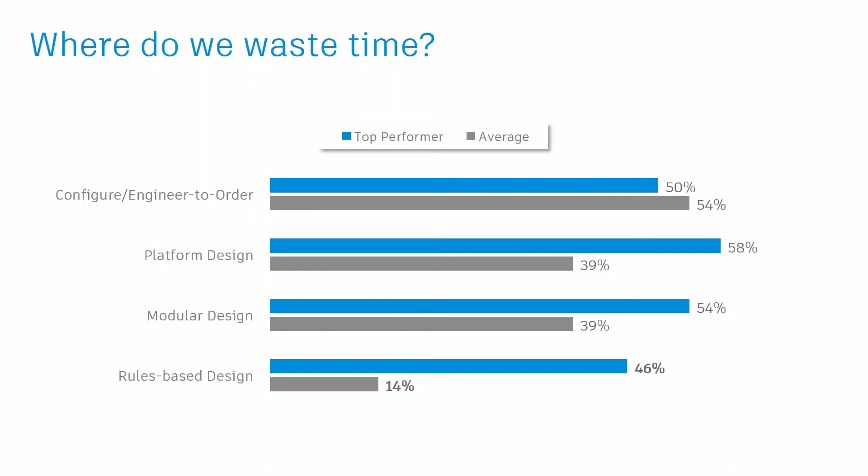Another area we can waste time is simulating our designs. Simulation is fast becoming a much more integral part of the development lifecycle, helping us to make better decisions about our designs and to make those decisions faster.

But part of the challenge of using simulation is the way we integrate it into the development lifecycle. A solution that's not an integral part of this process can add additional steps requiring information to be passed between separate design and simulation software. The result often means that users spend considerable time updating simulation setups to reflect the changes of a design.

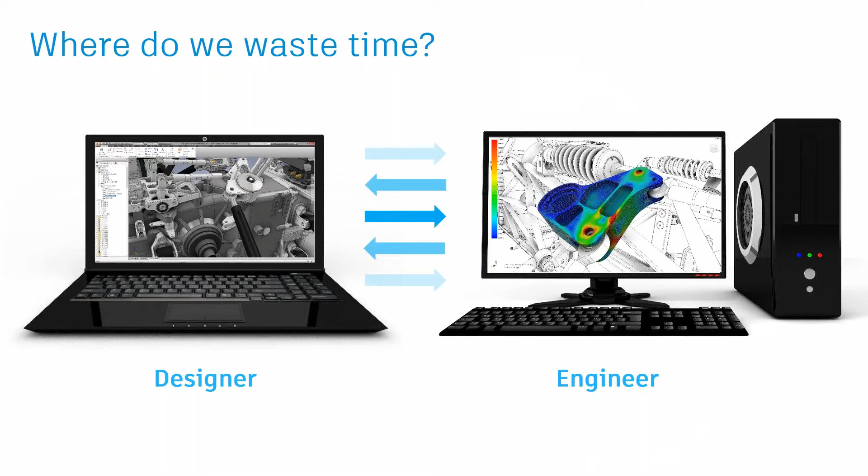So with this in mind, how can we recover some of the time wasted creating and simulating our designs? Let's take a moment to look at such a workflow. In this example, we're going to be working with a robotic welding cell, and our customer here has requested a high-mounted robotic welder.

We need to design a brand new structural frame that we know is going to meet our customer needs. We want to make sure that we start inside of Inventor, and we do this to make sure that all of our data is not only secure, but also managed effectively.

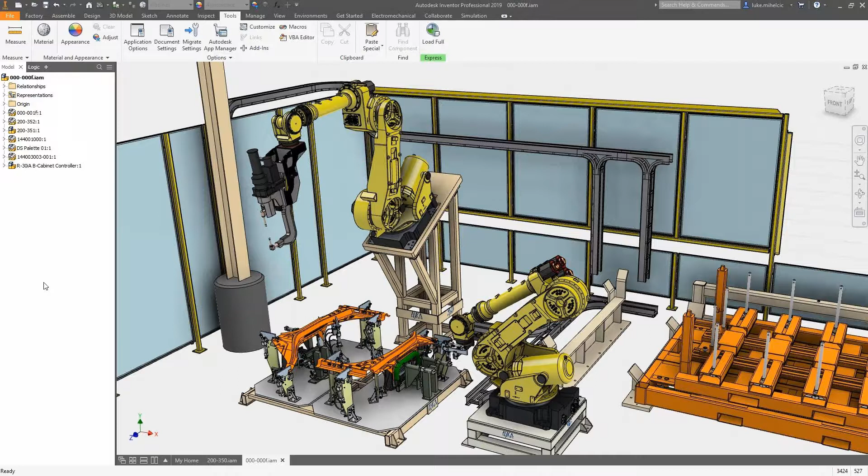Here we can open from Vault, where we'll check out all of the relevant components, and this ensures that no one else is editing the files at the same time.

We'll start with one of our customizable iLogic assemblies. This will help us automate the design process and save valuable engineering time. iLogic enables us to explore different design combinations in real time. We can change height, depth, width, and top offset, and even suppress the front braces if we don't need them.

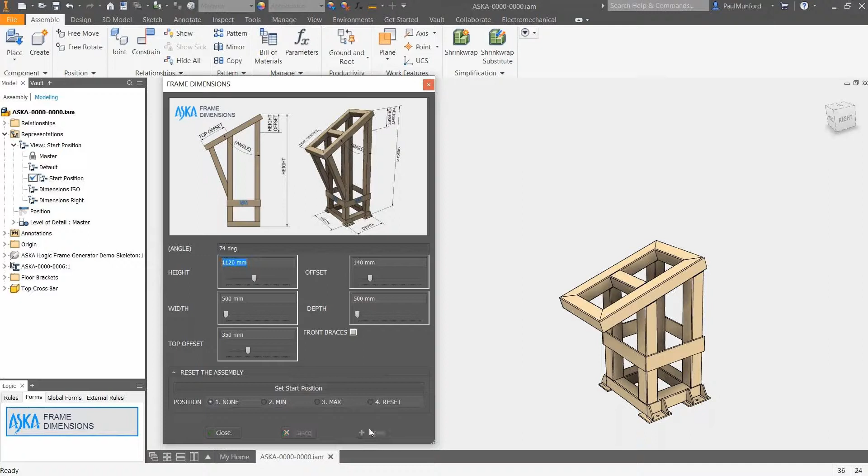Once we've got all of our customer requests in place through the design options we've selected, we can save this new design and check it back into Vault.

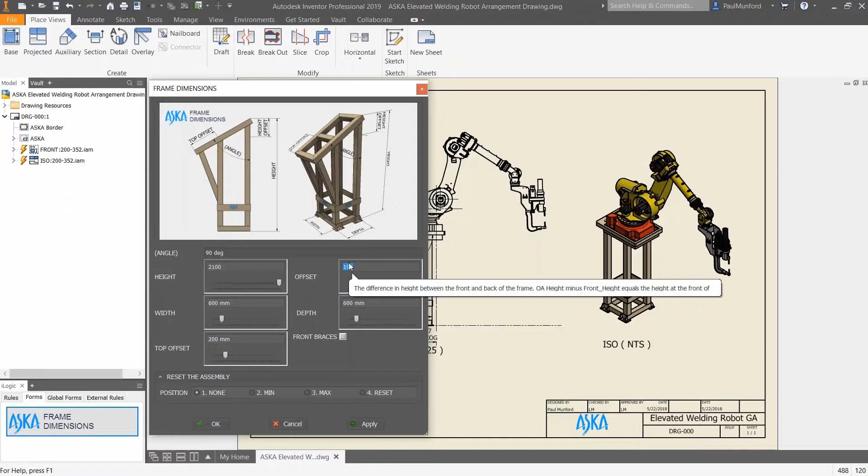Now, an alternative way to explore the new design options is to work with the same iLogic form, but use a drawing template. This is a great way to quickly respond to RFQs, and because drawings are automatically updated in minutes rather than days.

We simply input the customer requested options, adjust the updated dimensions. Now we're all done, we can check the design back into Vault. This enables us to then move on to the validation part of the design workflow.

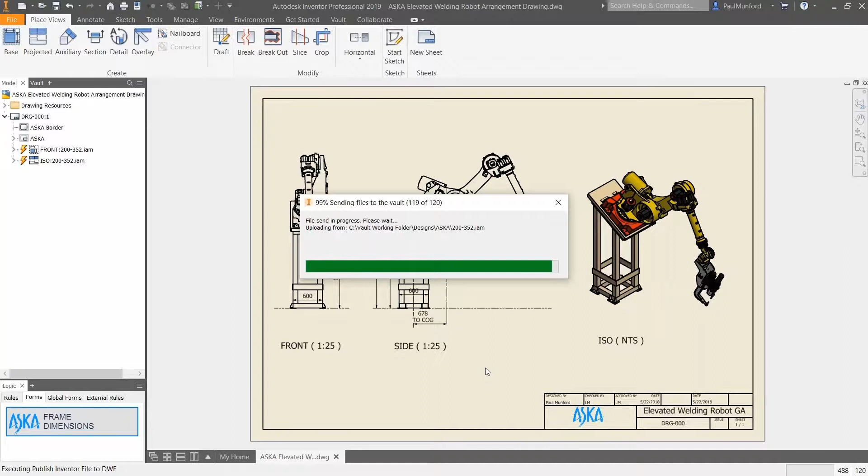Now, because we're using the product design and manufacturing collection, we can use Nastran in CAD right inside of Inventor. Once we get into Nastran in CAD, we'll simply start the setup of our simulation.

And since we've got a structure with plate and structural tubing, we can simplify the model down to mid-plane surfaces. This allows for the same accurate results in a fraction of the time.

Working from right to left, we'll add some constraints to the bottom of the feet. We'll apply a load where the top surfaces are supporting the robotic welder.

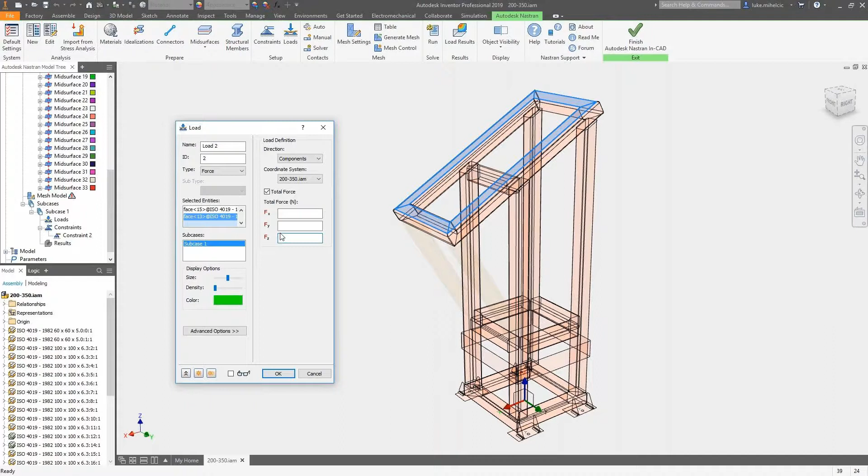And since we're working with surfaces, we need to set our contacts, or define our contacts, and the relationship they have in the surrounding geometry to ensure that all of our surfaces are in contact with one another.

Using our mesh settings, we'll adjust our element size and click Generate Mesh. Using a finer mesh will give a better resolution, and since we're working with surfaces, it'll still run extremely fast.

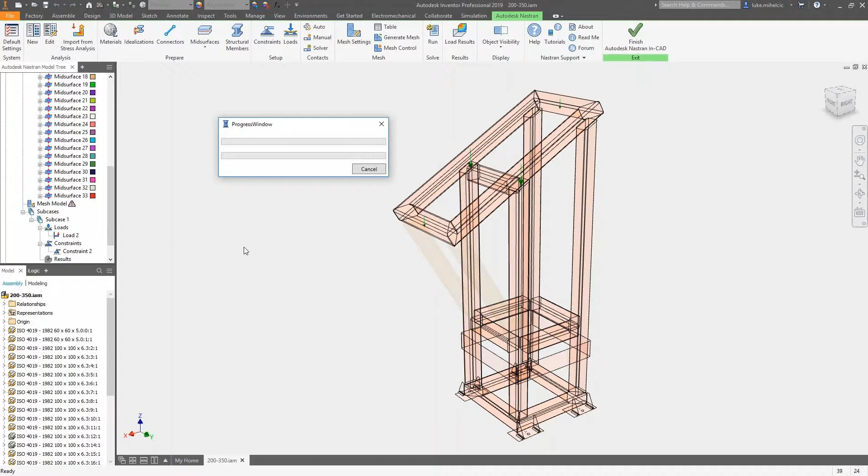Once our mesh is generated, we can run the simulation, and after our simulation is complete, we can adjust some visibility options to help us understand areas of concern within some of our design.

Next, we can animate the results, and keep in mind here the deformation you see is exaggerated to help identify areas of interest. As we take a look, you'll see that von Mises stress is well under the yield of our steel material. You'll also see the maximum amount of deformation.

And how much it's actually moving. In this case, it's moving less than 1 millimeter.

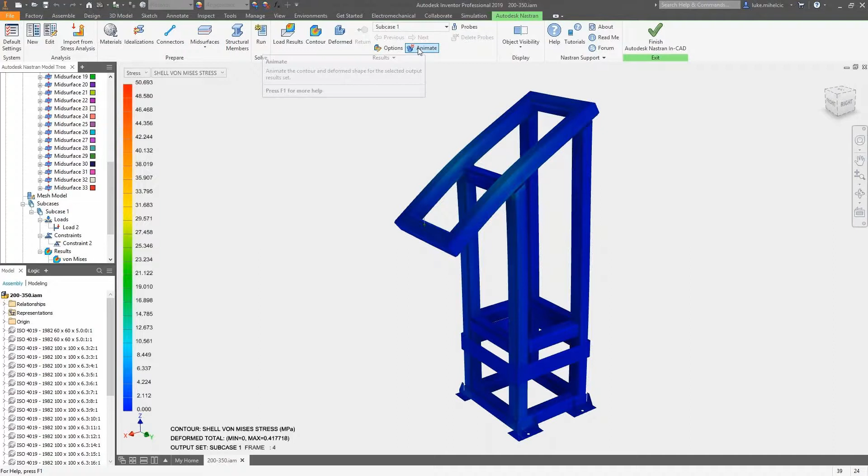Now consider what would happen if we add the braces back in and see how much it improves our design. We'll copy the analysis and all of our setup, and we'll add the braces back into the design, making sure that we capture the new surfaces.

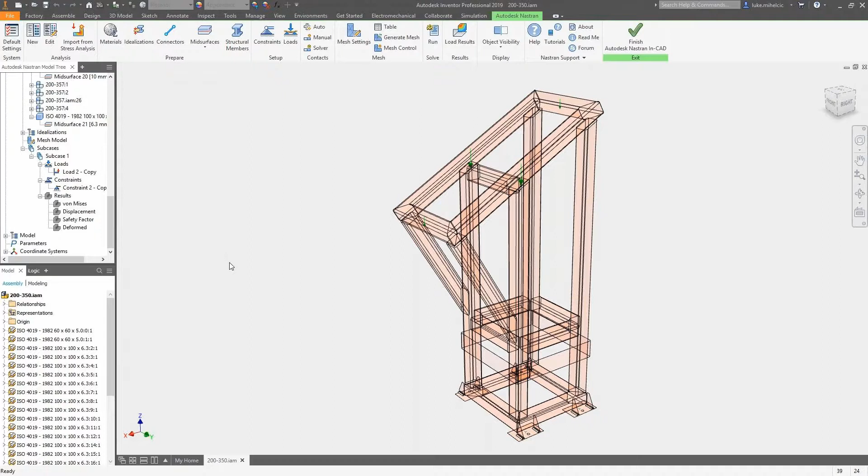We'll remesh and rerun our analysis. And then when we look back at the results, you can see that we've cut the displacement in half, as well as reducing the von Mises stress as well.

So with this in mind, now that we've validated the design, we can get everything back into Vault and move on to the next step of the design process.

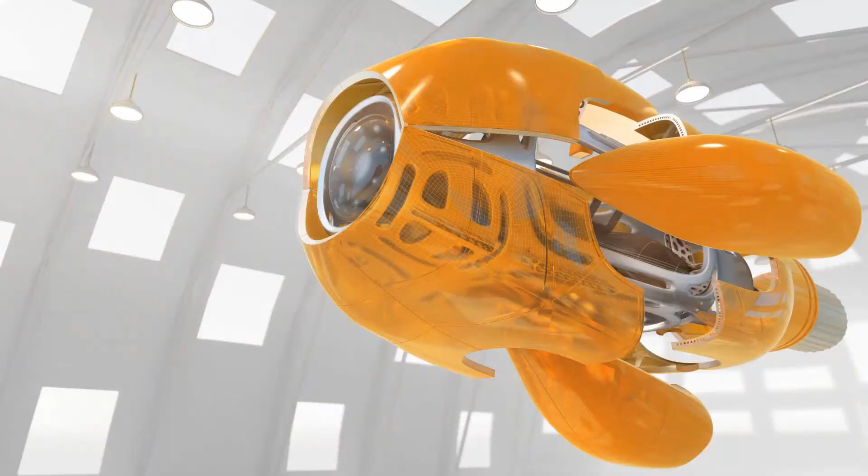So the areas shown in the previous workflow highlight how you can help reduce wasted time. But there are other factors beyond this where we've just shown that you should also consider.

Now, the survey that I referred to before, the Tech Clarity Survey, found that engineers waste on average 15% of their time managing design data.

Some of this is in key areas like sharing information with other departments, finding the right information, managing change, working on the wrong or outdated information, reusing data, and collaborating with engineers in different locations.

The worst offenders wasted the equivalent of a day, a week or more, and this is for each engineer in the company.

Those who can relate to some of the previous points I made around finding information and data reuse really need to be asking: what is the value of that time to you, and the time that you're actually losing?

Collaboration is an essential part of the development process. Nearly half of all companies surveyed by Tech Clarity said that collaboration is a significant challenge for them. There are the typical collaboration issues, many of which are internal to a company, issues with sharing data between departments or working on the wrong data.

But it doesn't matter whether you're looking internally or externally. Engineering teams experience challenges working together with other departments and with external suppliers and customers.

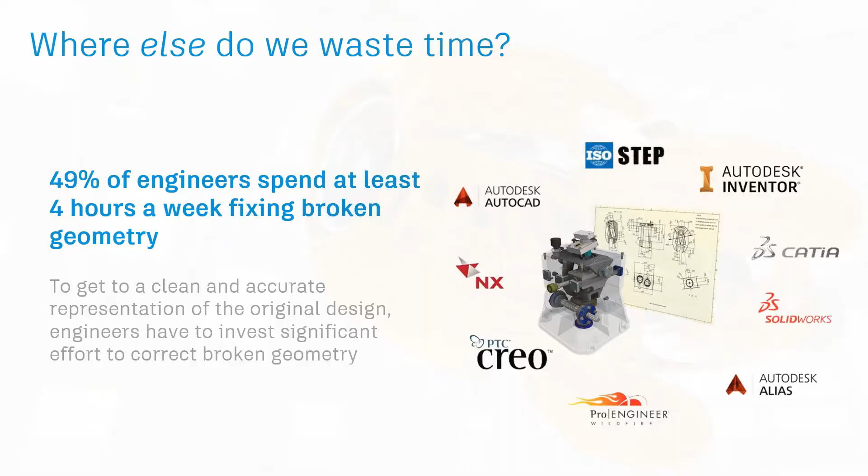One of the easiest ways to free up capacity for more innovations is to manage your data better and make collaboration easy. Here, using Autodesk Vault Professional allows us to track changes, understand what's work in process, what's for review, and ultimately what is released for manufacturing.

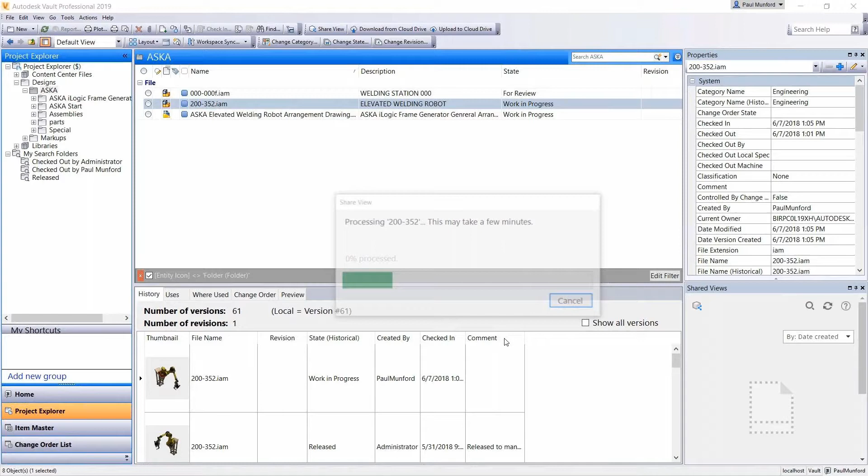Another benefit of using Vault is collaborating with shared views. Shared views allow you to share designs without giving your data away. You can view in a browser or copy the link to share with both internal and external stakeholders. The Autodesk viewer then allows you to zoom in, pan, rotate, explode, and measure. You can also add markups and comments.

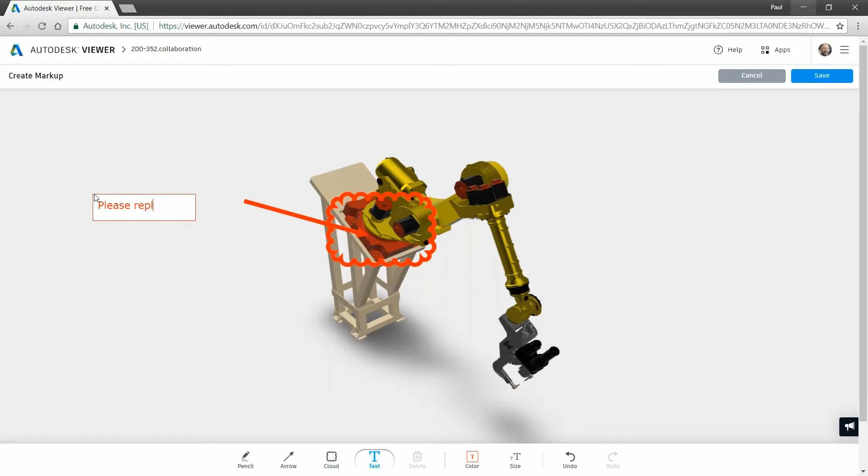In this case, we know we need to replace the welder base with an updated model from the vendor. After we've saved all of the markups and comments, all of these are automatically tracked and associated with the assembly. Shared views can also be accessed on a mobile device, and this allows you to collaborate with virtually anyone, anywhere.

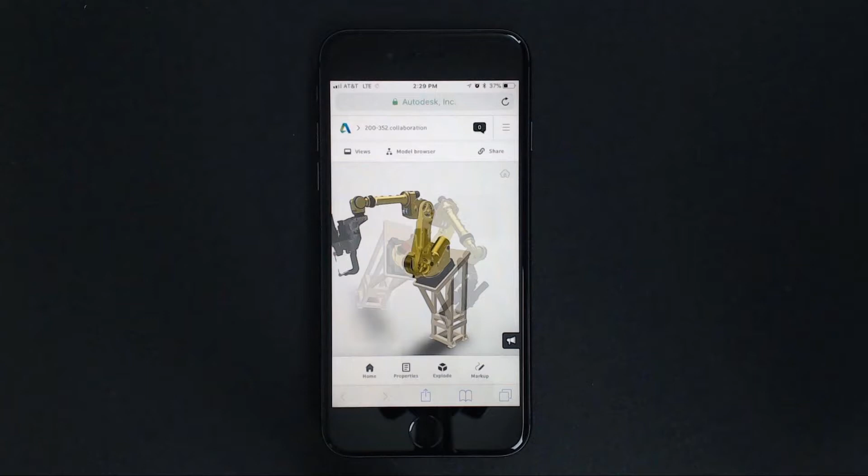Now we're going to open the assembly from Vault and check it out. Once we have the file open, we can go to the Collaboration tab and open the Shared Views panel. Inside of this panel, you can see that the comments have migrated through to this, and we can now take action. We'll change our selection priority and open the base.

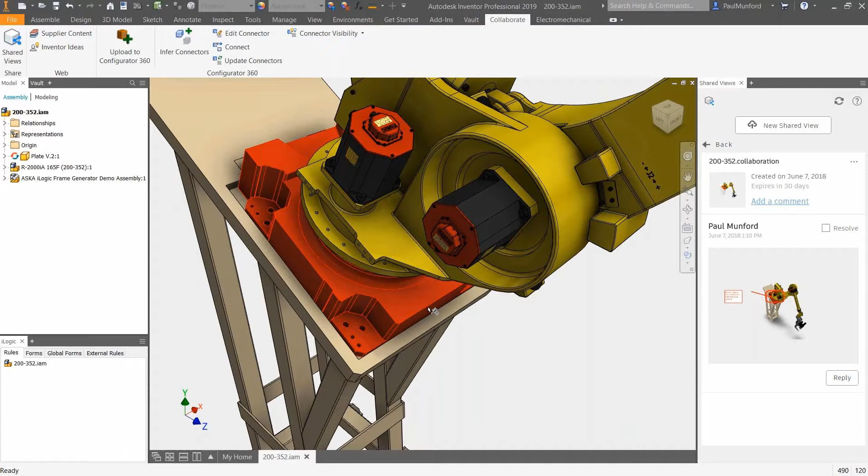You'll notice that this is a SolidWorks file that has been placed using the AnyCAD technology. This means that when we replace the current file with an updated version from the vendor, our base plate, which is associative, will automatically update.

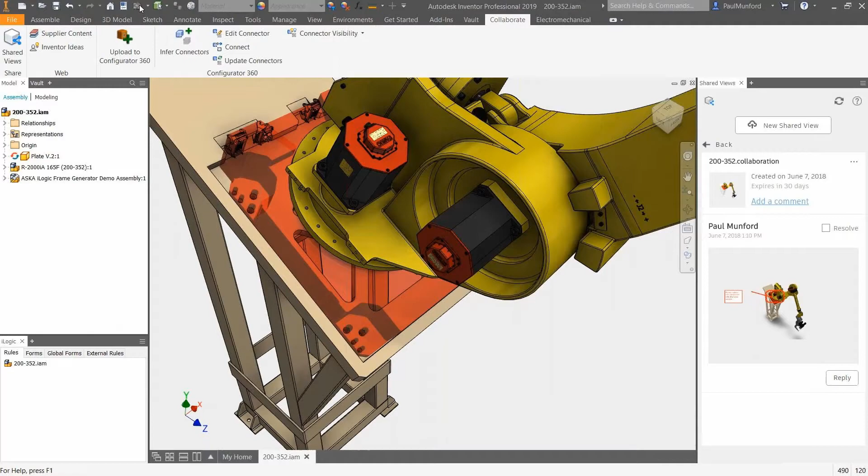Any of our associated documentation will also update, so the 2D drawings will follow through. So with our 2D and 3D geometry up to date, we can check our assembly back into Vault and move to the next step of our design and manufacturing workflow.

We've already shown numerous ways you can help reduce wasted time in your development process, but let's take a moment to look at a few more. These are related to the manufacturing workflow.

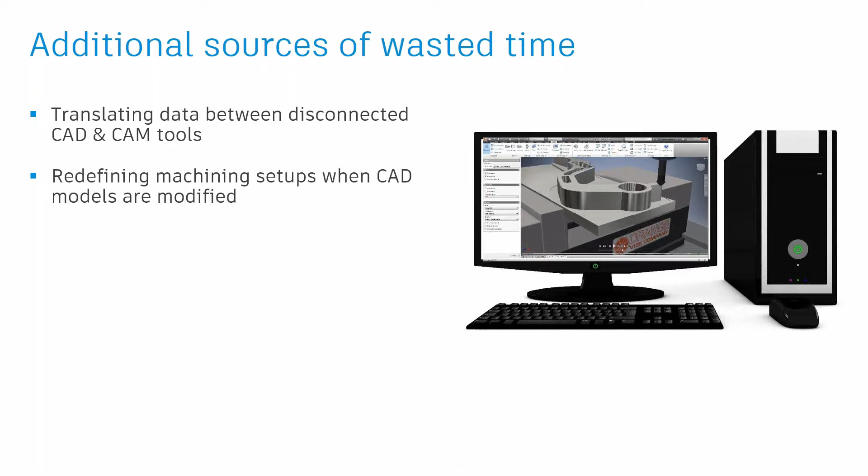A common waste of time comes from moving data between the design office and the factory floor. Moving designs from our CAD software to a CAM software often requires translation, which results in a broken workflow. As a result, changes to the original design of the CAD software aren't linked to the downstream CAM toolpaths, meaning that time has to be spent importing and then recreating setups and toolpaths, something which may have already been done.

It might be that managing the revisions of designs or drawings often results in the wrong parts being made. Though a design may have changed in the engineering office, how can we be sure that the factory is using the correct version when it comes time to make it?

Similarly, nesting of sheet metal parts is often a manual process. At best, it might be done using separate nesting software, but even then, changes to the original design may not flow through to any nests already generated. So how can we recover some of the time wasted translating files between software, managing file versions, and reducing the amount of rework when a change occurs?

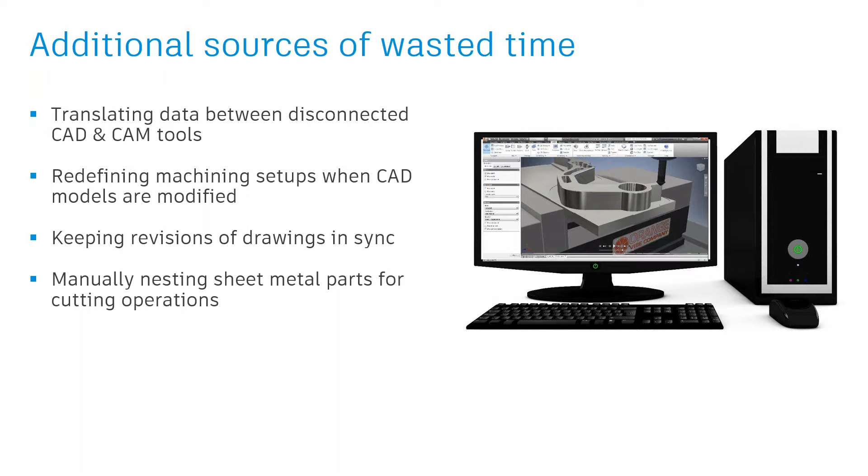Again, let's take a brief moment to look at such a workflow. Let's look at how we can better connect design to manufacture with in-canvas CNC and nesting workflows.

We'll start by creating an adaptive 3D milling operation for a robotic welder mounting plate. Here we'll select a machining boundary and a top height directly on the model, and this will allow for automatic toolpath updates if your model changes.

Next, we'll use 2D adaptive to mill out the inner pockets, and you'll notice that our first operation is still programming in the background. This is one of the key features that allows for simultaneous programming.

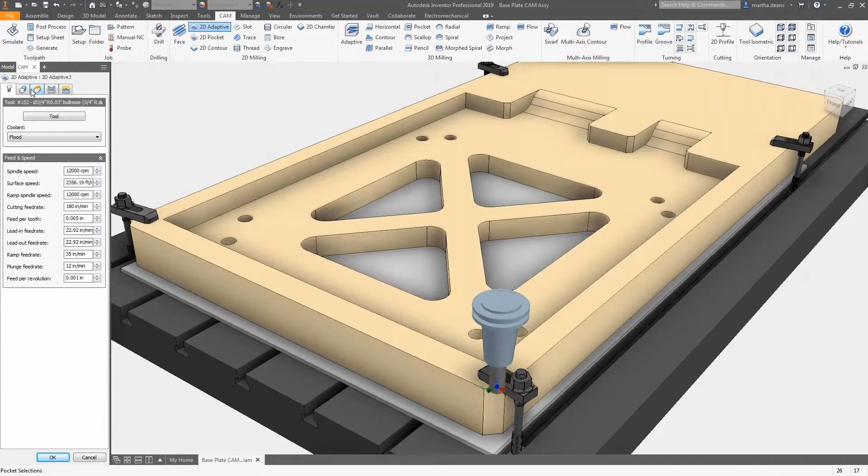We'll add a derived operation for a 2D contour and a flat end mill. This will clean up the pocket bottom since we're using a sacrificial plate under the part. We'll also add another finishing toolpath for our inside face. The sloped edges on the back will require a 3D toolpath, but with our milling done, we can start the drilling operations.

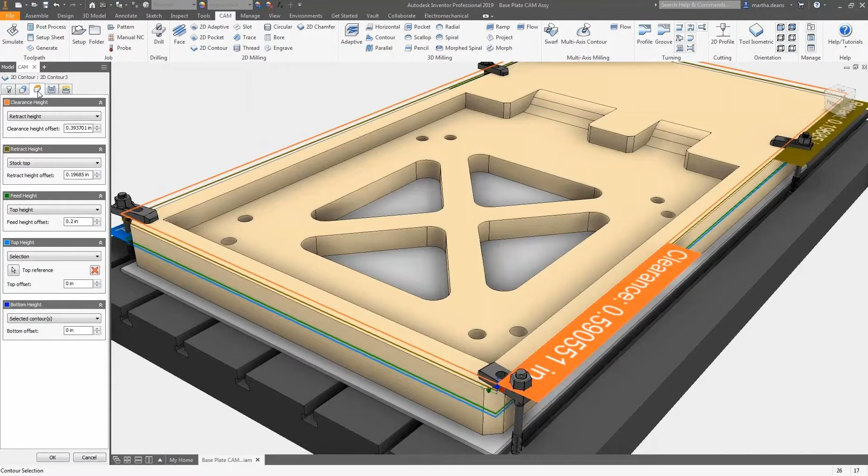Now we'll start out with a spot drill, and we can use this select same diameter to quickly select all the holes. We can duplicate the spot drill operation and select the drill size we want.

On the height tab, we can adjust the drill bottom height. We can make sure, though, that we can check the drill tip through bottom and add a breakthrough depth to ensure a clean exit. And here we'll also adjust the cycle to chip break to keep the chips flowing.

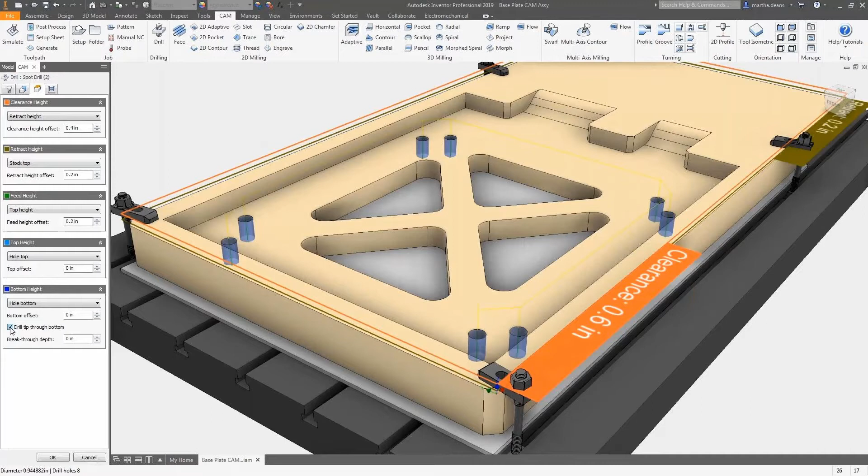Next, we can simulate the toolpath and use the information tab to look at the detailed information about every part of the toolpath. Using both ways adaptive allows us to cut climb and conventional, making better use of tool movement and faster roughing times.

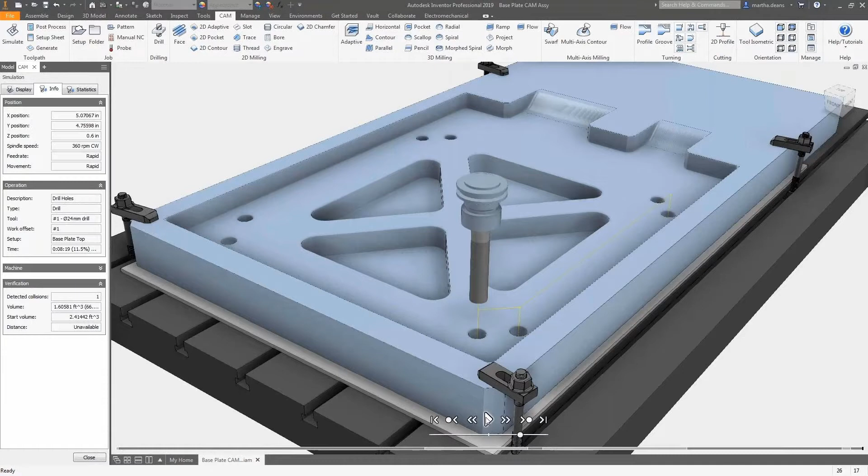When our simulation finishes, we get a notification that our part has been changed. And since we're working within HSM, which is inside of Inventor, our toolpaths are associative. All we need to do is select generate toolpaths, and all the previously generated toolpaths automatically update.

Now, the next workflow we want to look at is the nesting of sheet metal components. Here we'll start with a quick search in Vault and open with checkout of the assembly that we're looking for.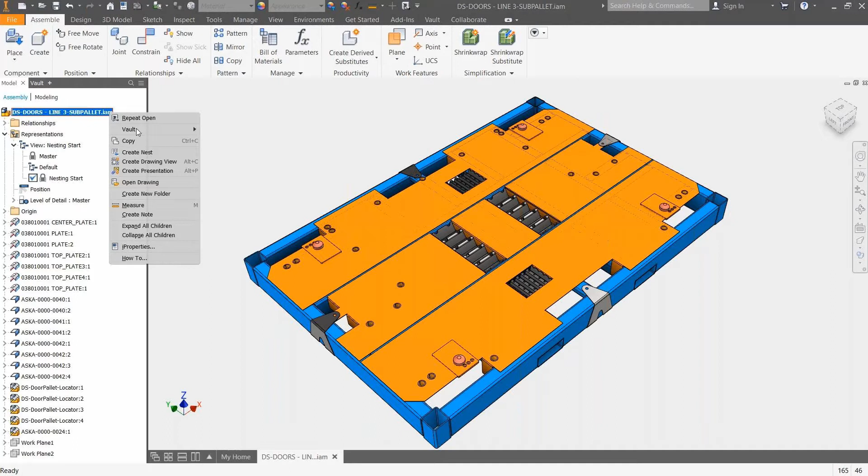To get our nesting started, we'll click on the top level assembly and select nest. I'll select my customized nesting template and click OK. Any flat patterns in the assembly are automatically added to my nest, and the materials are also pulled over.

The next step is to click create, where we'll accept all of the defaults and click OK. The nesting utility automatically nests components made with similar material and thickness. It also picks up the quantities of the individual components automatically.

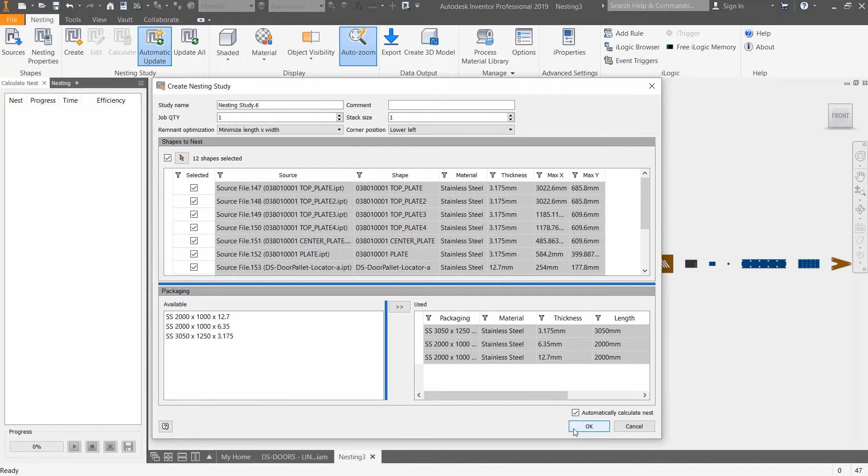We'll click the boundary of the nest we want to work with to zoom in. Now we'll right-click the boundary and create a 3D model so that we can move over to HSM for laser cutting.

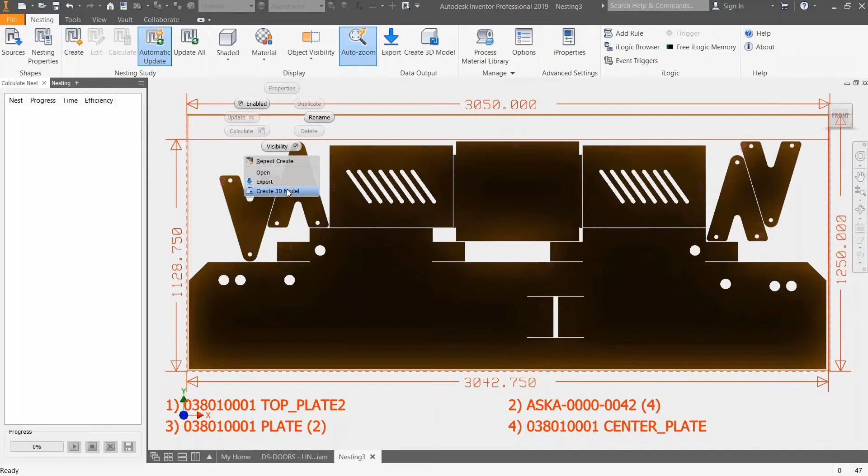Here we'll select the CAM tab and setup to get started. We'll set the orientation to the lower left corner of our stock and change the operation to cutting. Now on the stock tab, you'll select from solid in the drop-down and pick the stock body.

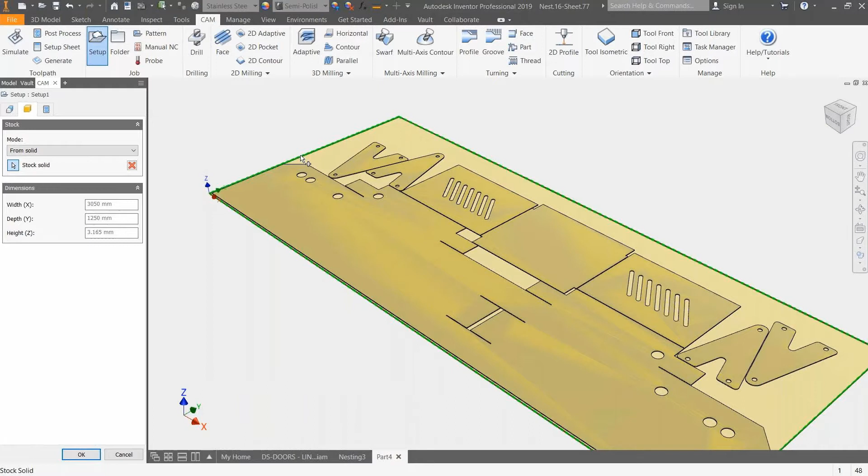Next, we'll add a cutting operation with a 2D profile. We'll select the first face and then tick the box for select same plane faces. This will grab all of the components within the stock boundary. Now back over on the tool tab, we'll change the type to laser cutting and click OK.

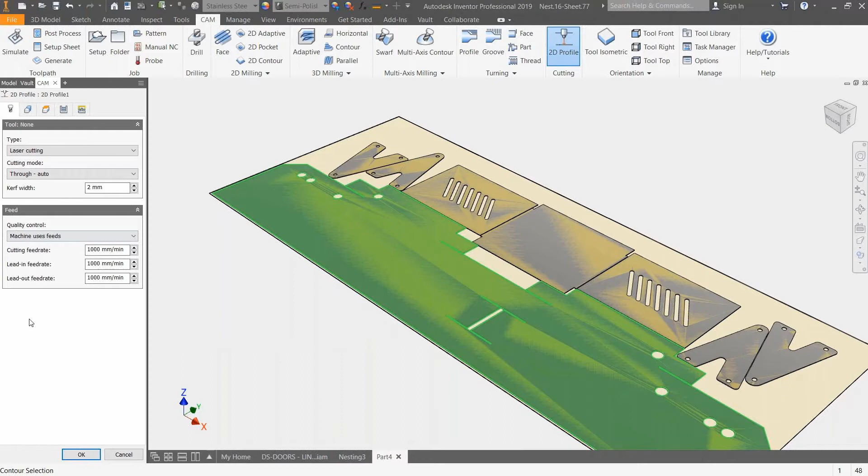Now we're ready to simulate. Simulating the laser allows us to visualize and evaluate the toolpath and make any adjustments needed prior to sending it to manufacture. Now that we've verified all of our nesting requirements, we can check everything back into the vault.

This associative in-canvas CNC and nesting workflow helps reduce design and manufacturing errors and rework.

Let's look at what most of us know to be the current design process. Given that nobody has an unlimited number of resources, nor do we have an unlimited amount of time to explore alternate ideas, we've learned to make moderate improvements to the products we bring to market. With limited time, we often select designs which largely resemble the few concepts we are limited in creating.

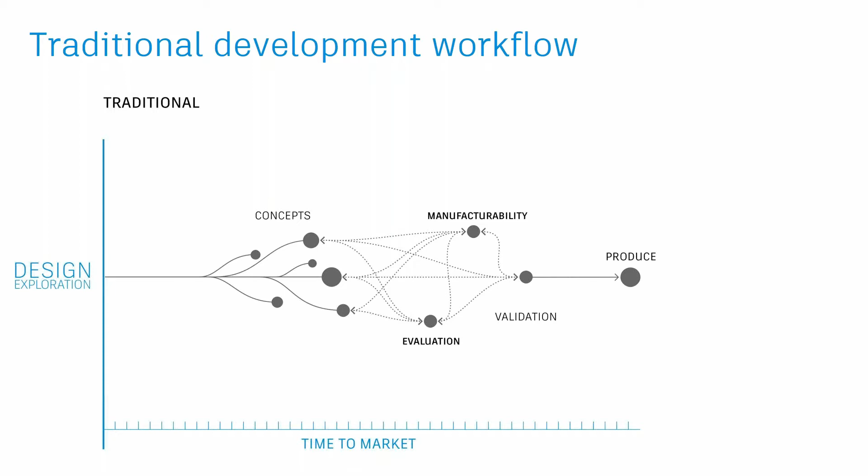We then, as part of a serial process, evaluate for strength, fatigue, or performance, and again move on to the next step in evaluating manufacturability. Now, this process is linear in nature, serial in its process, and the time available to explore more ideas is limited to that which meets our production schedules.

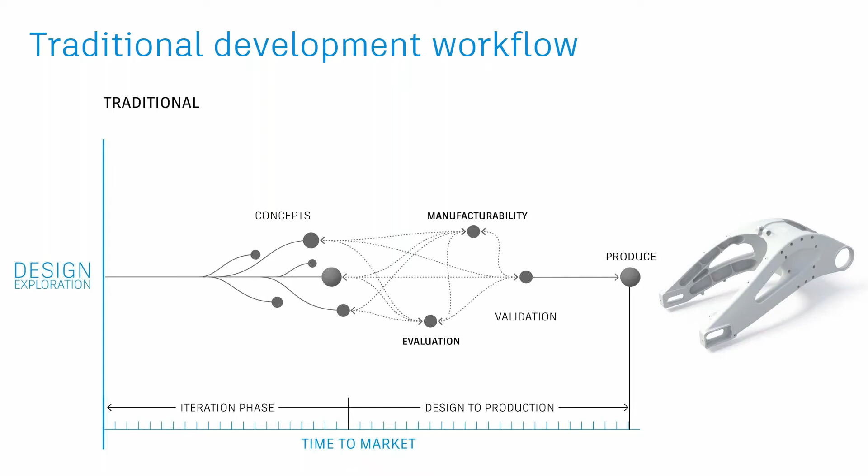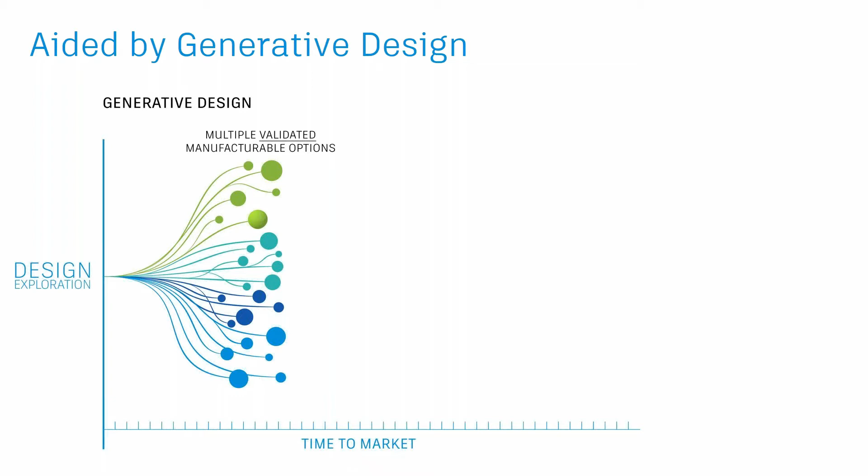This is where generative design technology from Autodesk is radically different. Generative design provides validated design alternatives by evaluating the problem, strength and performance requirements, and manufacturing processes all in parallel, performing the function of generating geometry based on multiple criteria and freeing the geometry creation burden from the engineer.

This enables you to explore a much wider solution domain, expose more information about validated manufacturable options in order to make the most informed decision about what is the best for the business. And not only this, but in comparison to a traditional development workflow, you can potentially save considerable development time by using generative design. Alternatively, it might allow for a much broader investigation of design solutions in a similar amount of time.

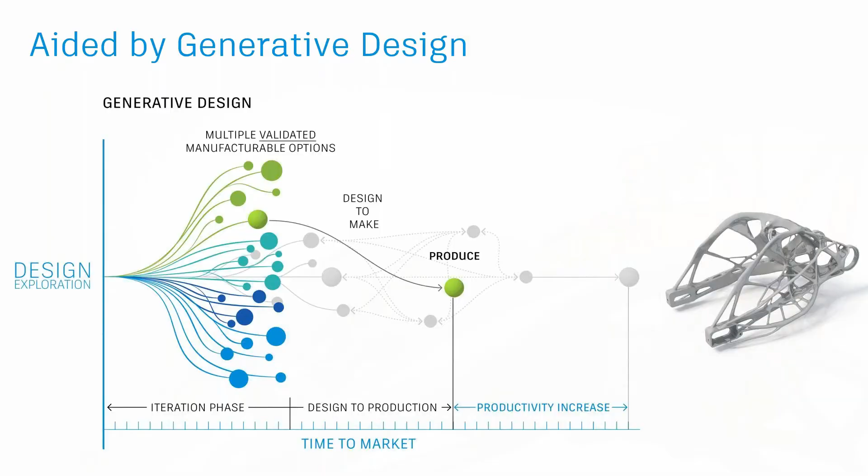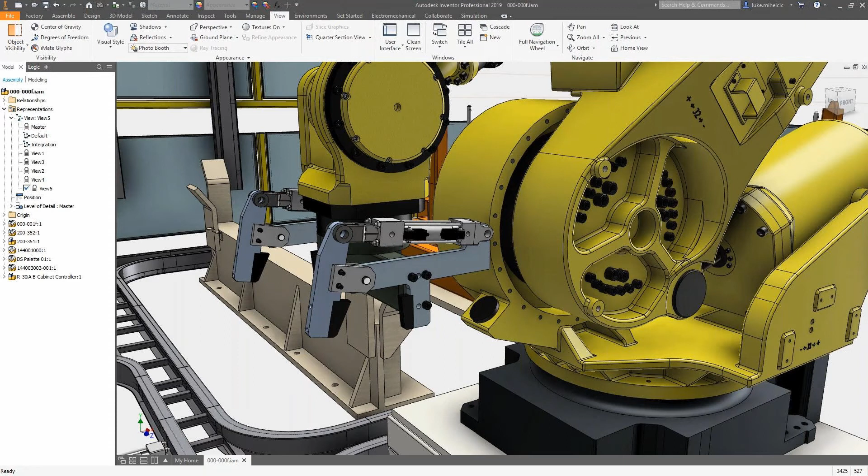Traditionally, innovation takes an investment in time and resources, especially in design and engineering, with design, test, design, and test again methodology. But with generative design, you can explore multiple design solutions based on real-world manufacturing constraints and product development requirements. In this example, we want to improve the performance of our robotic welder. Here, we're looking at the end effector and see if we can reduce the weight and overall the complexity of the subassembly. The result is significantly lighter, which gives our robot better performance.

We also have a simpler assembly that's faster to assemble and maintain. So let's have a look at this process.

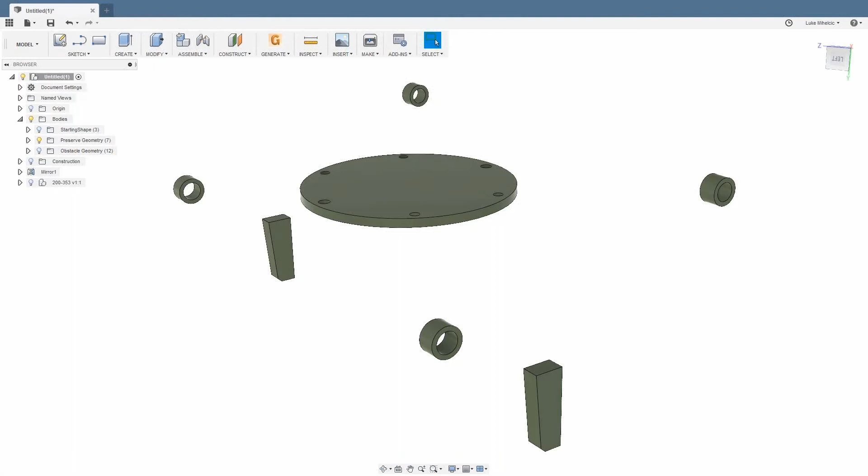With generative design, you define the conditions, not the geometry. We start with what is called preserved geometry. These are the connection points and mating geometry that are required in the final design. Next is the obstacle geometry. This is where you don't want material to go. Think of things like holes and clearance areas.

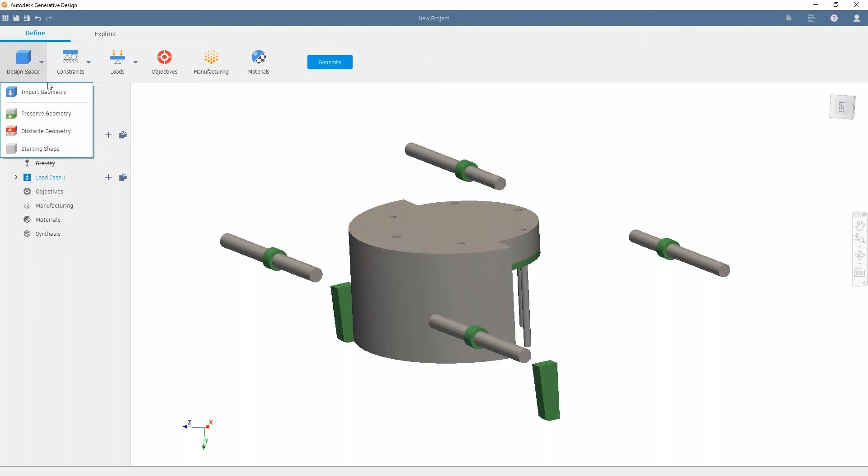After you've modeled these inside of Fusion 360, you can hit generate, and inside of generative design, under the design space, we simply select the preserved geometry and assign it, and then do the same for obstacle geometry. Next, we'll define and identify the constraints, or where this is being held. In this case, the connection of face to the robot welder.

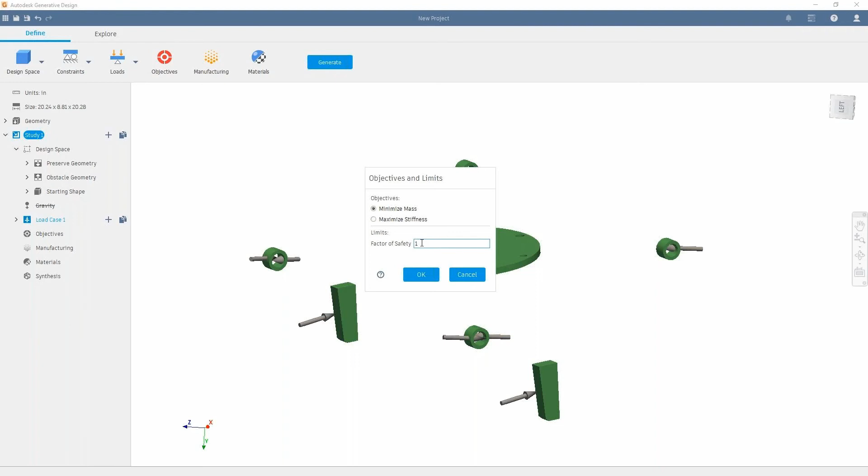We'll then add the loads or the real-world conditions that our parts need to stand up to, or preserve geometry connection points. Our objective is to minimize mass, and we'll add a safety factor of 7. And this helps give the generative design algorithms some guidance.

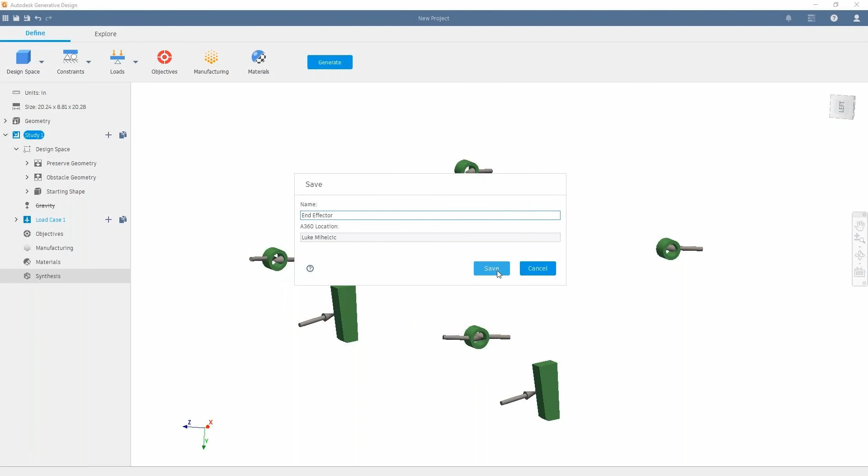We'll choose unrestricted and additive manufacturing methods, and then choose our materials with as many as 10 being able to be specified for each study. We'll set the synthesis topology to accurate. This will help give a tighter resolution.

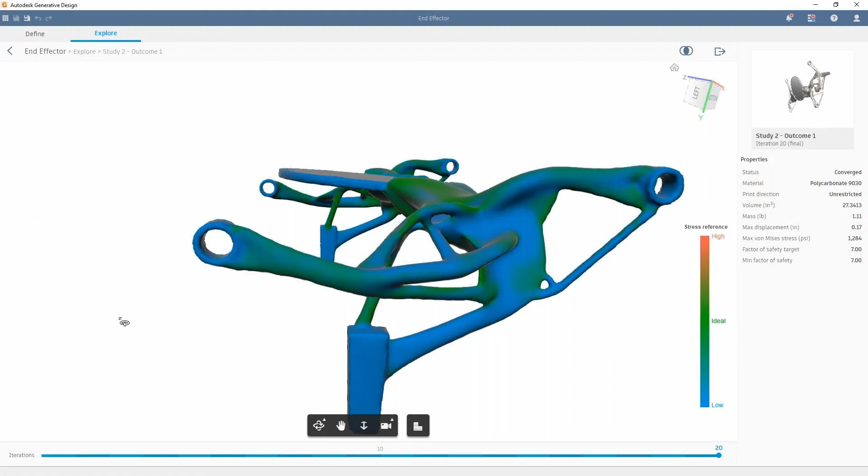Once we generate our study, we can then go through and explore out the outcomes in a couple of different ways. Once we find a study that meets our needs, we can export it to SAT or STL file. In this case, we're going to open up inside of Inventor and drop it into the robotic welder assembly. Now, generative design helps deliver innovative engineering and design solutions without the traditional investment in time and resources.

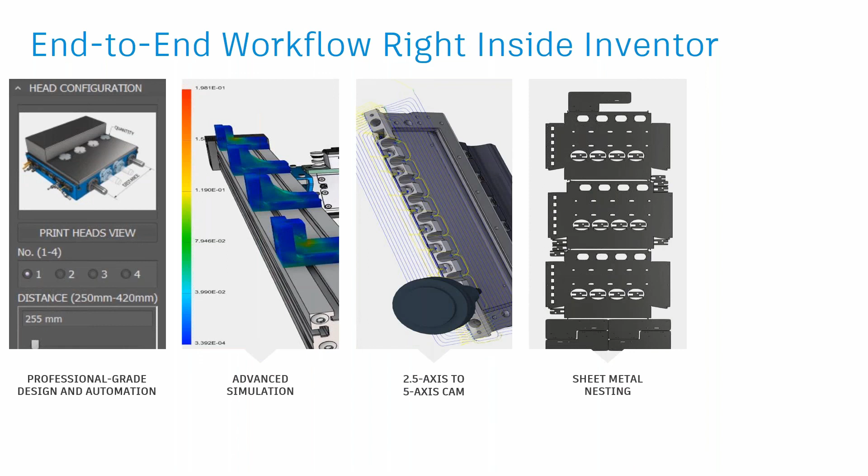Whether you need the professional grade design and automation tools, the advanced simulation capabilities, the multi-axis CAM workflows, the embedded nesting technology, or factory planning capabilities, all are accessible through a single application and a single subscription. And while individual roles in an organization might use certain technologies more often than others, everyone is working from and has access to all the information that makes up the complete product definition.